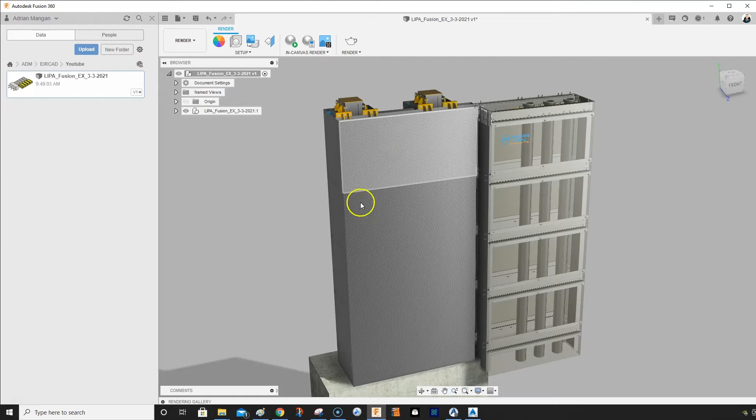So this is part 2 of the video, where I'm going from Fusion 360 to the Augin app. First, this is the model I was using to render in Fusion 360. This will not export great because of the finishes on it.

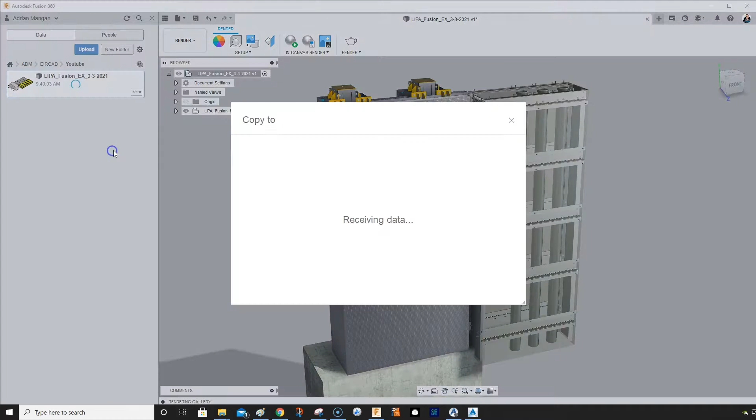So what I'm going to do is remove these elements, but I don't want to lose them. So I'll check the time on this file, you can see it's 9:49, then I'll copy it to the same folder. The copy now shows 10:16, which is the current time. I'm going to click on this and rename it.

I'm going to name this Augin, or we can just call it AR, depending where we're going to use it.

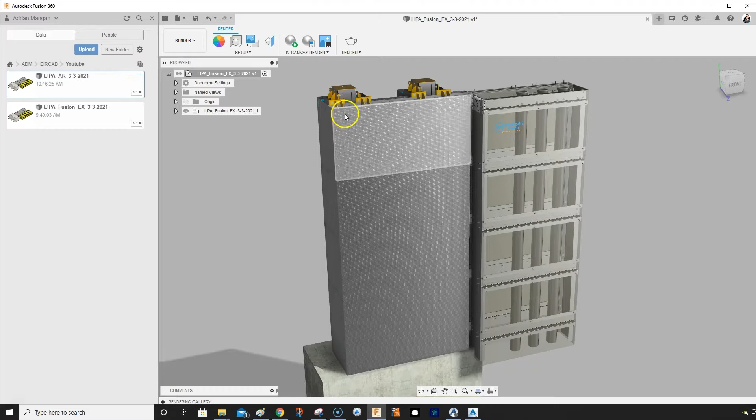I'll leave this one open because it's got some renderings running in it, as you can see here. I don't think it's going to give me a preview yet, it's too early. Oh, there it is. So we can close that.

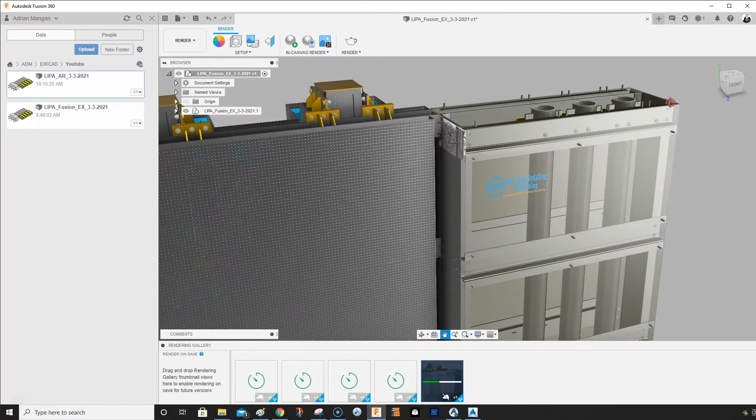So now what I've found is I have used a glass finish before, which did actually work. It wasn't clear, but so what we're going to do is make sure we don't start working in this one. Let's open this other one.

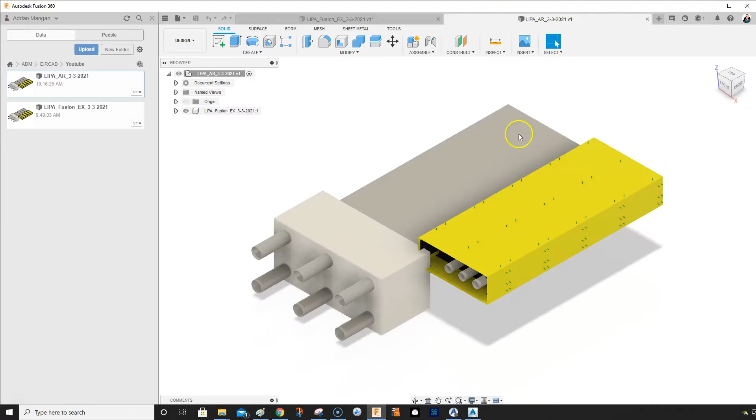It'll open our second file up here, which will be called Lipa AR. This is it here.

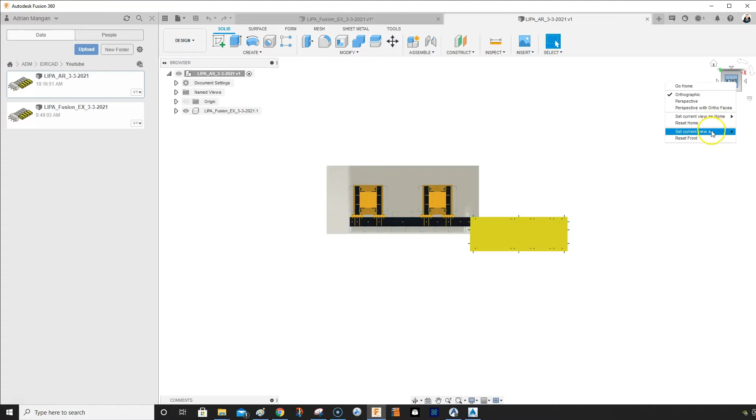Let's reset this, so let's click on this as the top. Make sure you click on it to have it going at a 90-degree angle first, very important. So let's set this as the top.

So now, for my model purposes, I don't want these because I won't be able to see, because the augmented reality right now, the way I use it, doesn't. You can't see through elements just yet.

So let's create components from bodies again. It'll take a second, and then what we're going to do is turn off these plates.

So what we can do is double click on them. We can find one and we should be able to get the rest of them. You can either turn them off or delete them. Usually when I copy the file, I'll just delete them because I have the original file here anyway.

This is taking a little bit longer because the other file is doing some renderings for me. So these should turn to components right now.

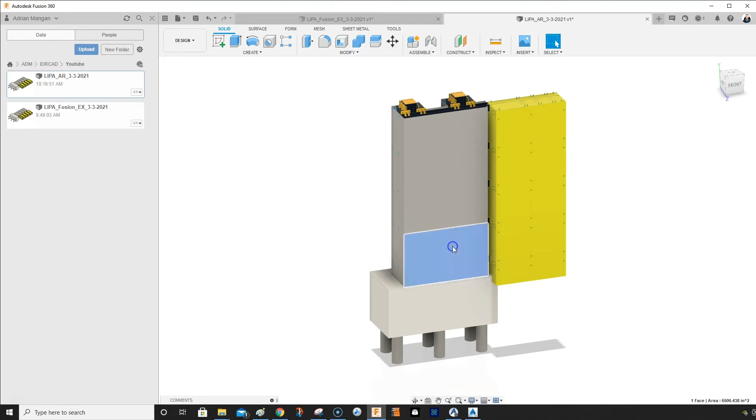And then what we'll do is double click on these and these, we'll turn them all off because all we want is the structure. Now if I click on it and right click, sometimes it'll let you delete these, other times it won't. See, it's an error, you have to find it in here to delete it.

So let's click on this one and we'll scroll down. Because we're running renderings in the other one, like I just said, it'll be a little bit slower, it can be a little jumpy.

Now here's your first plate, so click on the second one. Yeah, so a lot of times you can see that's a plate there as well, this is a side plate.

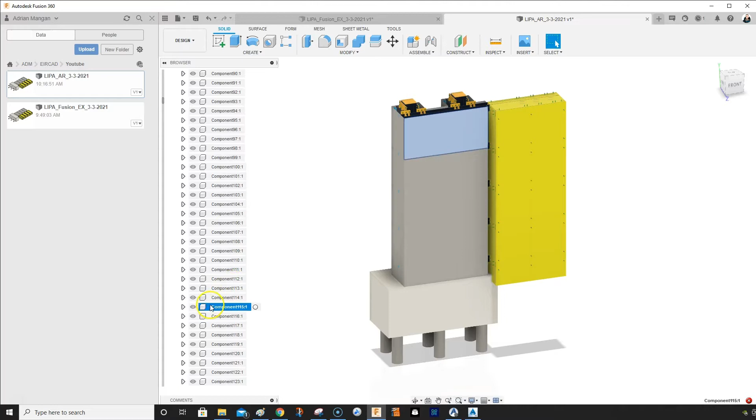So what we'll do is come in here and just delete it, we'll do it the easy way, we'll delete that one, so that's 15 gone.

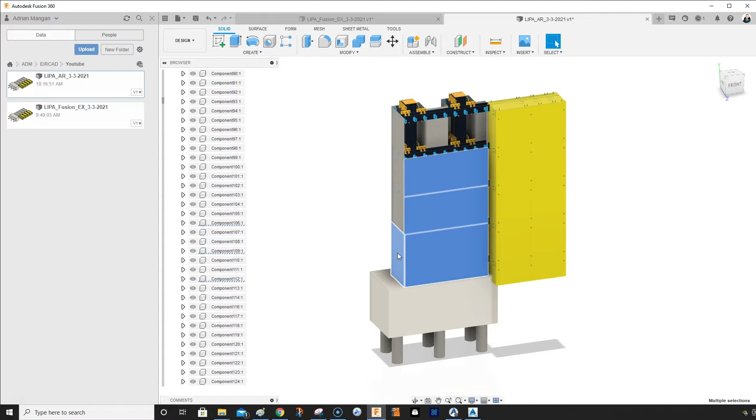So if we click here, we can see that's 12, 9, 6, can't see that one, so we'll just delete these ones, 12, 9, and 6.

So we deleted the front. What we'll do is just delete the front plates, right?

So let's click on this one, double click, let's scroll, we don't know what direction it is, it could be up or down. It doesn't seem to be up here, so it's probably the other direction. Just scroll the whole way anyway.

Ideally I wouldn't really have another project running at the same time in Fusion, because, as you know, it's an online program, so it's not just relying on your computer, it's also relying on your internet and other things.

So if we keep scrolling it could be a little time consuming, but I figured it was better to include it in the video. You can always fast forward through it.

So sometimes it's better to just grab this bar. There you go, so there it is there. It takes a little time, but doesn't take forever.

So let's click on these other ones, see if they should be close to it. There you go, so it's this 4 here. So let's start with this one, delete.

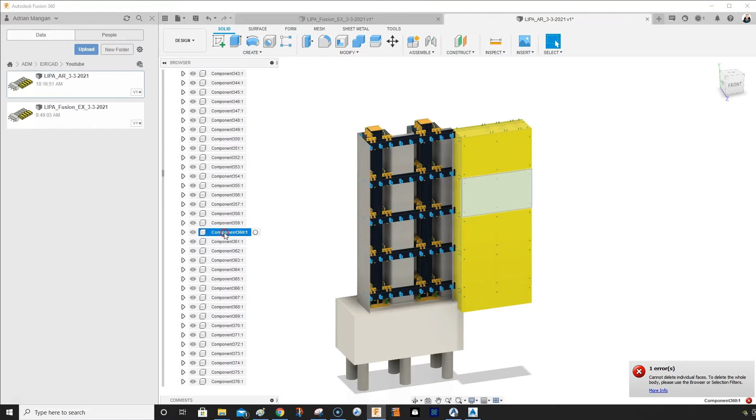It didn't delete the first one because I had it selected like that and it was trying to delete the face. So what number was that again? Sorry, 360. Delete.

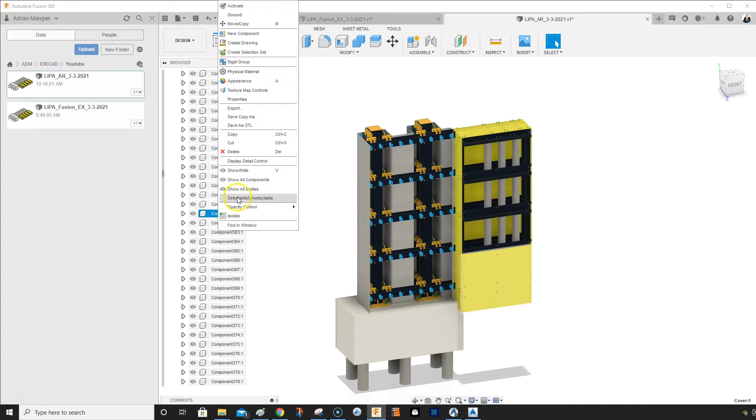359. Delete. Now you can also rename these, so I could call this cover plate 1. But we won't, we'll delete it. Alright, the ones on the top, let's not worry about them.

Now what we're going to do is, some of these appearances will go through, so what we'll do is let's render it a little bit. Let's render this.

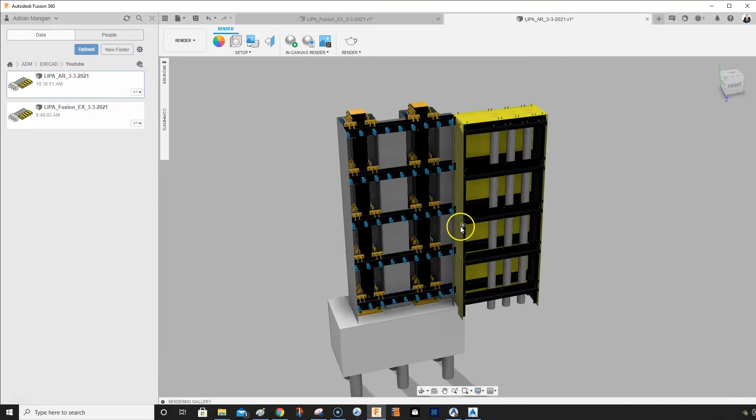Let's go to appearances and we're going to change some of these, because this is not going to work as wire mesh as far as I know, so it'll just end up coming out black. So if we do...

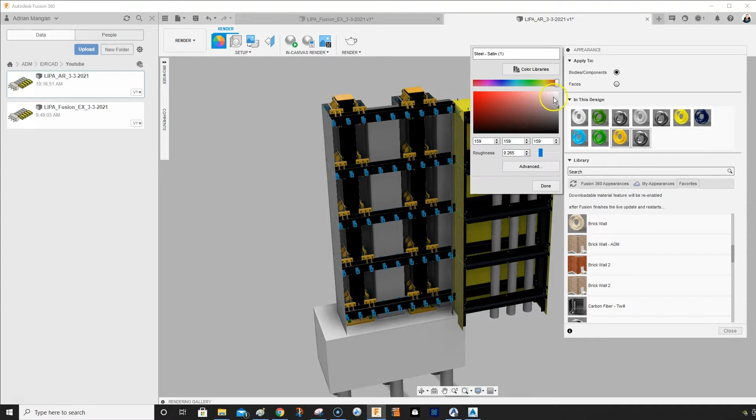I had a glass set up before which worked really well, but it's apparently not saved. So what we can just do is we'll just do something like steel and change it. We'll duplicate this and back the color down a little bit to a light color, and let's select all objects and apply that to this.

Now you're going to have a certain amount of tweaking around with this to get it right for yourself, so don't worry about it. I'm just going to click on these fast.

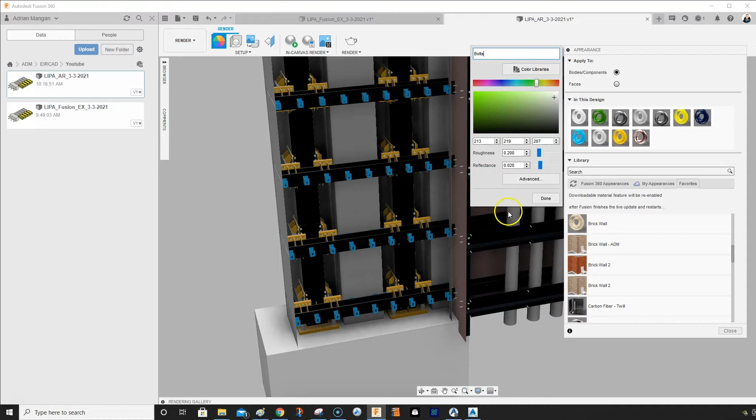You should also rename these. These are the bolts, so we can rename this bolt so you can find it again easier. And you can see the bolts have changed there.

Stainless steel, let's see, so we might be okay. Let's change this. We can delete that, that does nothing. Let's change the steel color.

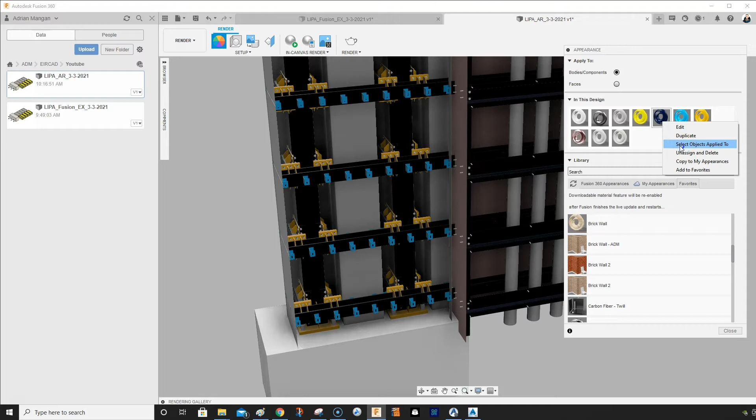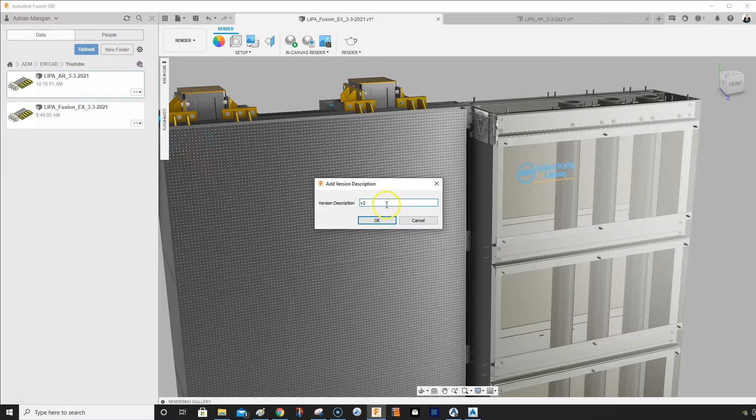Now, one tip I'll give you that I didn't do correctly. When I copied this file, the reason it doesn't have the appearances on it is because in this other one, I should have gone to save and saved it as version 2, and if you look over here you'll see this change. I should have realized when I looked at this that it was still the original save, so when I copied it over, that's why it copied over the way it did.

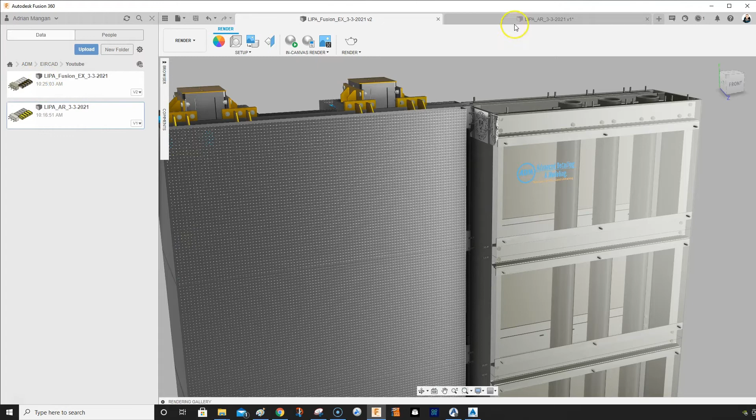So just keep that in mind. If you wanted to keep these when you copy it, save it first and then copy it. So now you can see the appearances are on this one, so that's why that didn't happen. But that's fine, it doesn't really matter because I wanted to do the appearances again anyway.

So let's check, select objects, apply to. Alright, so that's those plates. Let's go to appearances, and let's go to... you have to go to something pretty simple. Let's go to an aluminum.

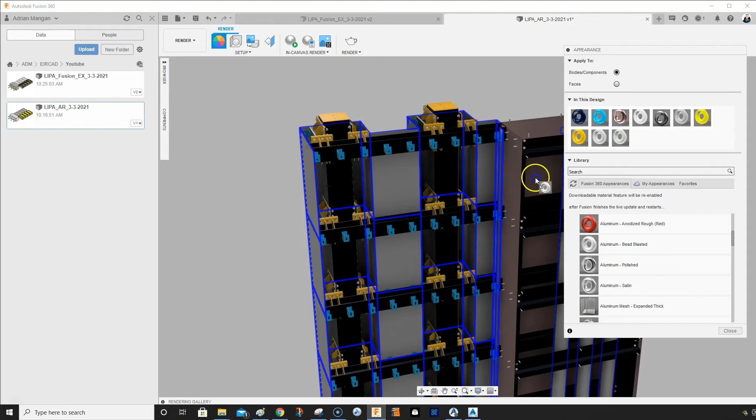Bead blasted, we'll try that and see. Now, like I said, it's going to be a lot of trial and error here. Let's click on these beams, let's back them down to kind of a blue color, a light one. Let's go lighter even.

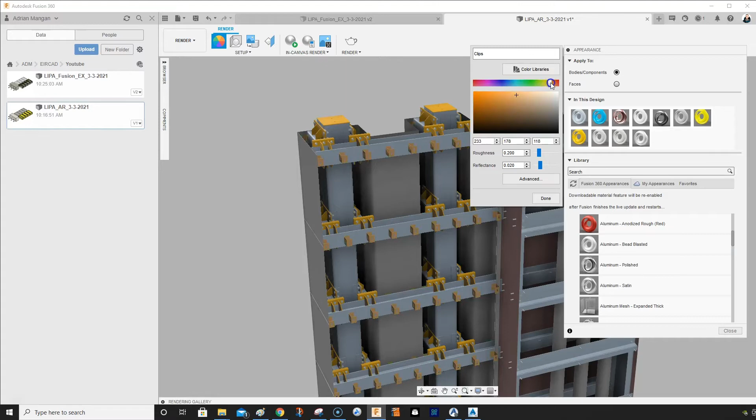And these clips, let's just rename that to clips, and let's back the color down to darker and in between. Nah, let's change it to like some sort of red or something like that, like an orange, a yellow. The yellow seems to be kind of safe, blue and yellow.

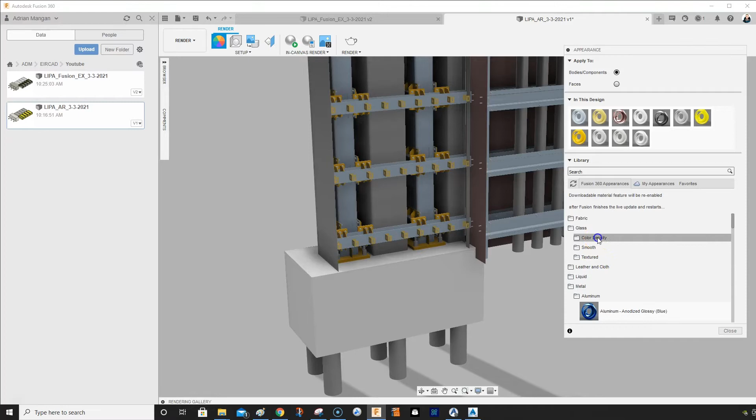So, alright, I think we're pretty good there. I don't want this concrete to have a concrete finish because then it won't show up properly. So what I might do is, let's see what happens when we put some glass on it. Let's just do a light colored glass, and we'll apply that to all of these.

Now I could have just selected them up here in the browser like I did before, but you can also just drag them on like this.

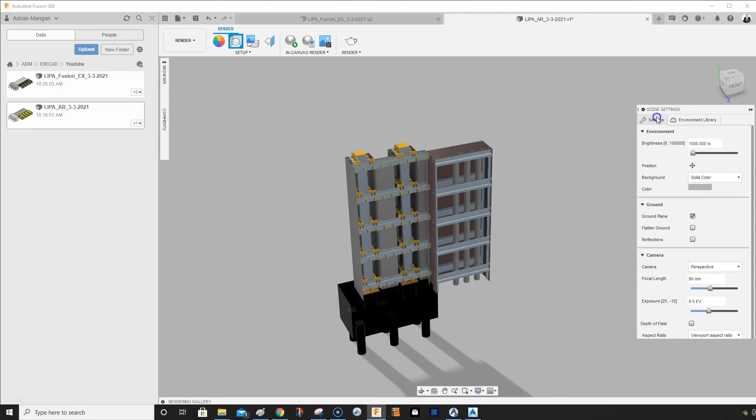So to give you an idea what this looks like, let's change the background. Let's go to the environment. Now you can see there's a lot of settings in here. You can play around with perspective, all those things.

You can save the defaults. I don't usually, I just kind of start from scratch each time. It doesn't take that long. So you get something like that. If I close that and then do play, you can see it'll render that and it'll give you an idea of what it looks like, right?

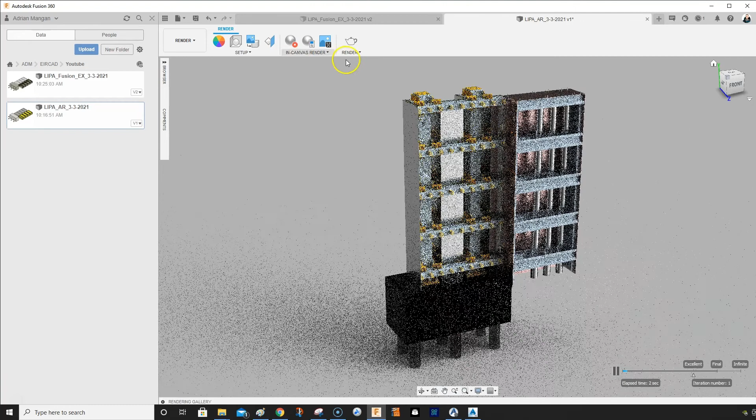So it's not really what we want it to look like, but that should hopefully work for the Augin app. So let's export and we'll see what happens.

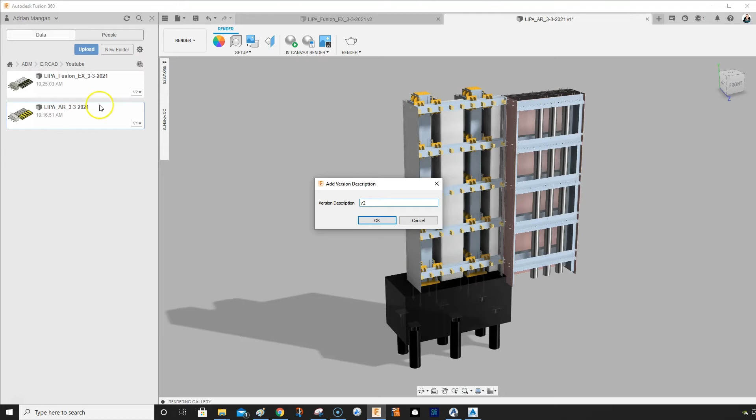So first of all, let's stop this and let's save this as version 2, and you'll see the image will change here from that yellow, and the plates will be gone on the front.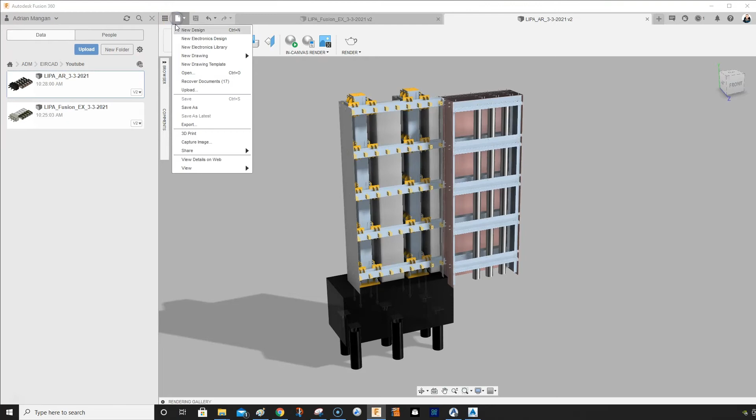And what I'm going to do now is export this, so that the Augin app is the FBX file. So I'm going to go to File, Export. It's set to F3D first, so go to FBX file. Where do I want to save that? I'll save that back into the folder where the job was, which is this folder here, and that's fine.

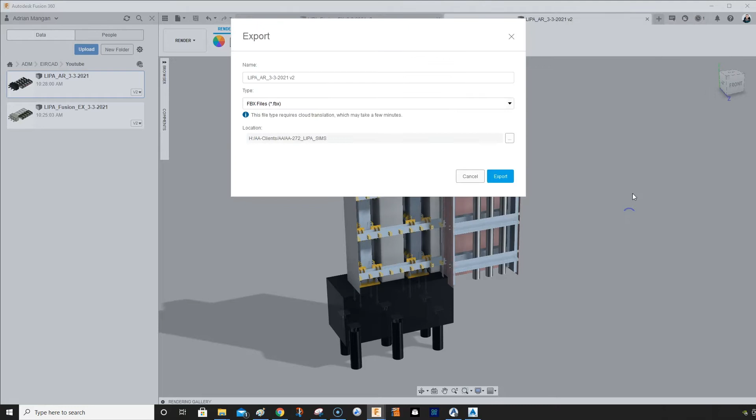And export. Now it's going to take a minute, so I'm going to switch over to the other screen and type in Augin app, and scroll down - it's augin.app, and it can be in Spanish.

I'm just going to try and get logged in before I drag this across. I'll enter the site, and now I'm in my Augin app. It's a free account, and the guys are very helpful if you need some help. It's in Spanish, as you can see, maybe Portuguese.

So we can upload. It does give you an option when you go to the home page to change this to English, and now we've changed it to English.

So for project name, I'm going to call it LIPA, and then we choose the file. So we're ready, let's minimize that. This is still working away, it can take a little bit of time, so I'll pause it here - it might take a couple of minutes and then we'll get back to it.

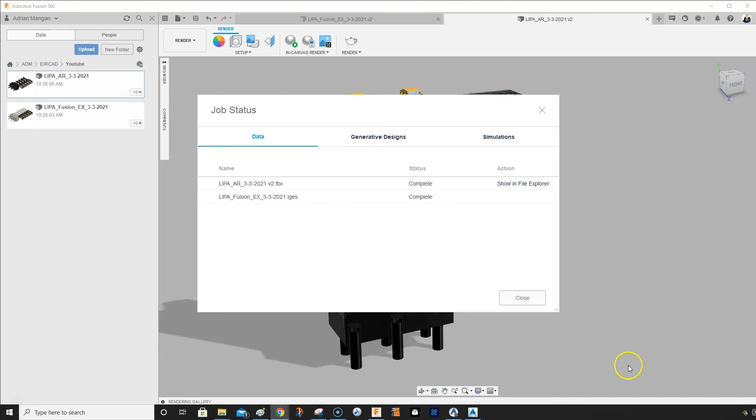So the file is uploaded - it took probably 5 minutes. Let me get back here. If I go to the file, I'm going to choose the file, go back in here, and this is the file FBX.

Open. So you can see here there's 2 file formats, IFC and FBX. I haven't really tried the IFC - I'll try that next, and that'll be a quick export from Advance Steel and a quick upload, so I can check the differences. So what I'll do is the FBX file.

First I do the FBX because I render a lot of projects anyway, so I have to bring them into Fusion anyway, so we'll just upload that. Doesn't take too long - project was successful - and then you need to go to your tablet. I'll record what's on the tablet and show you.

Hi, so I recorded this on my iPad. The sound wasn't very good, so I'm going to do a voiceover on this.

So here I am on the iPad on my screen, and there you can see the Augin app in the top left hand corner. I'm going to click on that - here's the app here. I'm going to click on the app, it'll open, and it's just going to load up whatever settings and models I have in there.

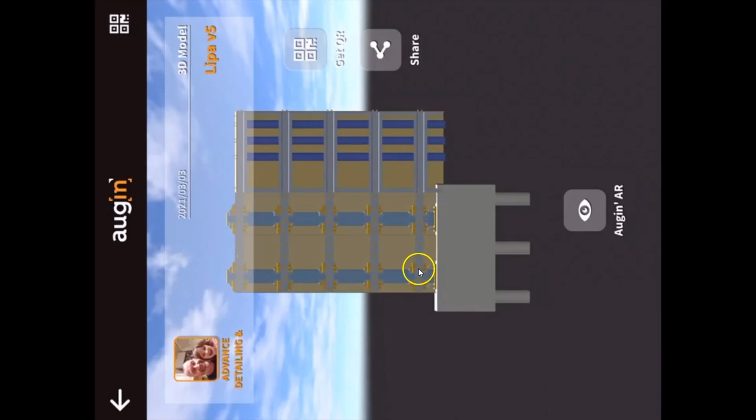Here's your model. You can rotate this model by just using your fingers on the screen, as I'm doing there. It's on its side because I kept the iPad in landscape mode, because I want to view in landscape mode so the video's not switching over and back.

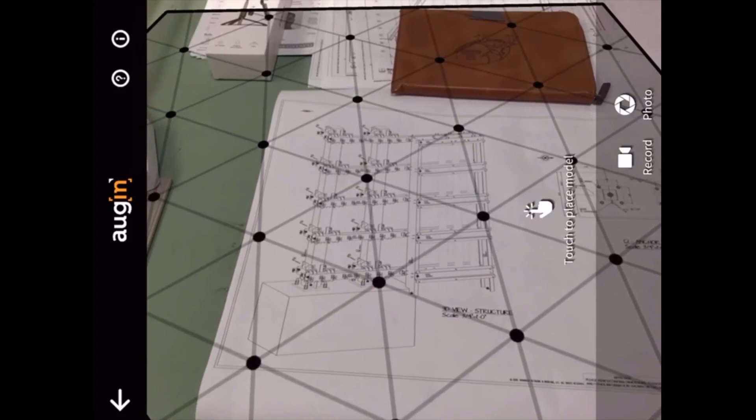So now you'll see this grid appear, and this grid is to locate - you can see touch to place the model. Before this used to find it difficult to pick a surface, but it works really good now.

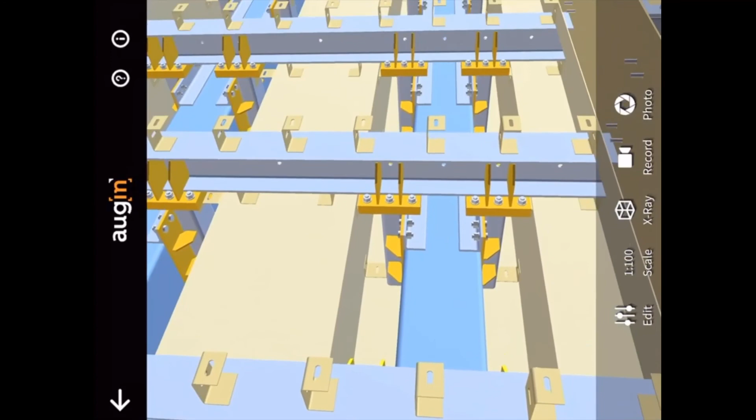And you can see here the model has come in a pretty large size, probably close to right scale I'd say - hard to tell really, but probably. So just use your fingers, pinch your fingers together like you do on a screen to make a photo bigger or smaller. Then there's also the X-ray mode.

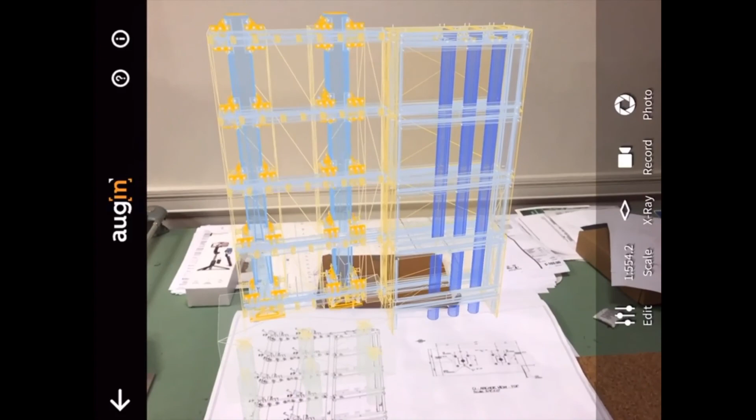The screen recording is a little choppy, but the Augin app is not that choppy - it's a lot more smooth than what you're seeing here on the screen. So you can see I have some holes there, that's why there's lines on those plates. You can see through the plates, which is really good - you can see through everything. So that's the X-ray mode.

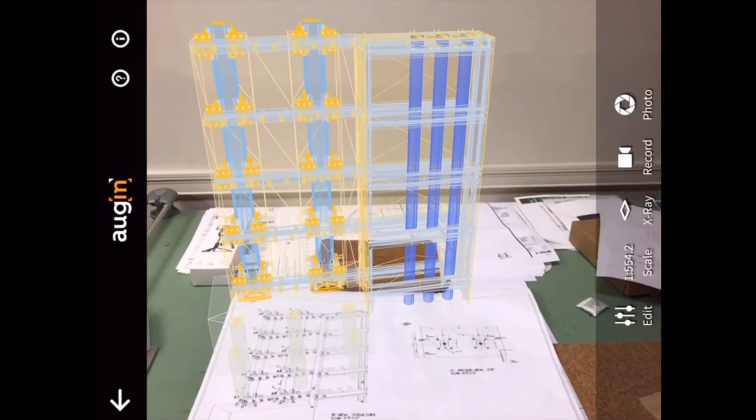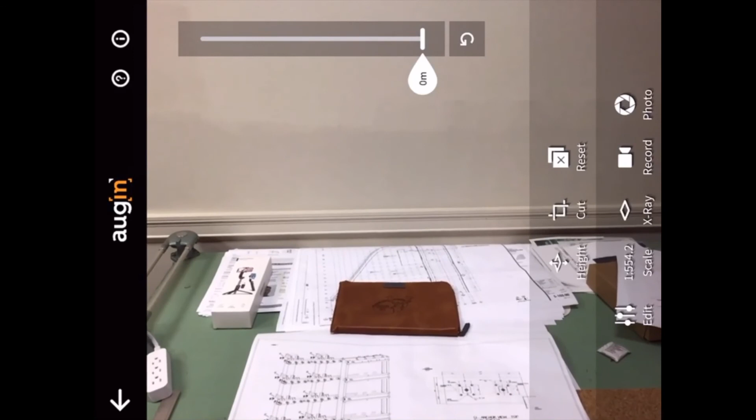Now you can also go to the edit button, and there's some other options. You can cut through the model, so you can cut from the top down. You can also cut from the bottom up, but it also moves the model down through the zero axis, which is good - looks really good.

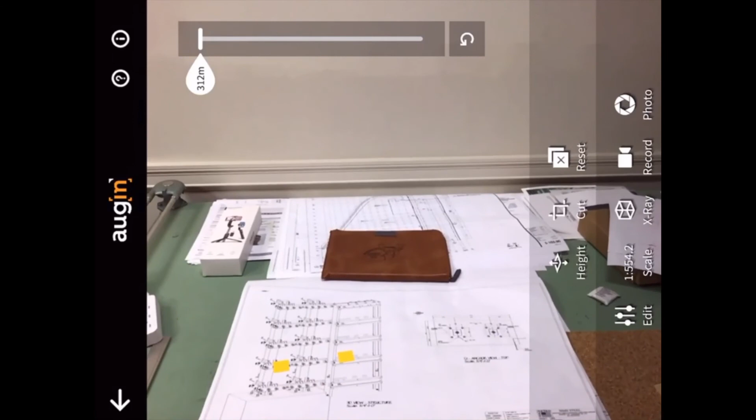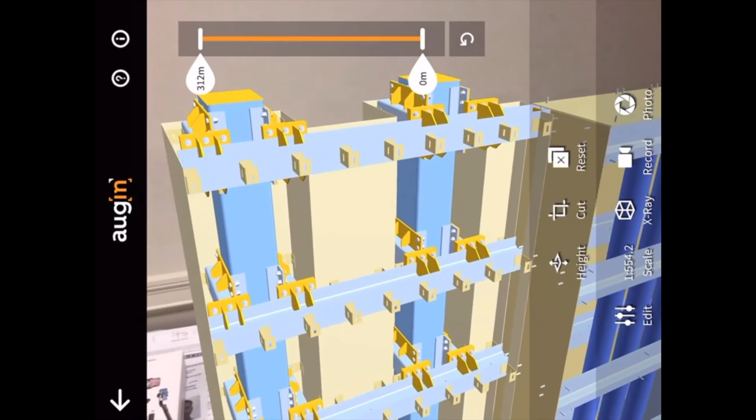Now if I hit the X-ray button twice, it'll go back to shaded mode, and I can pull it back up shaded, which is kind of cool. So I just want to repeat that the choppiness is from my video recording, not from the Augin app. I'm doing a screen recording there, and obviously it doesn't work so good.

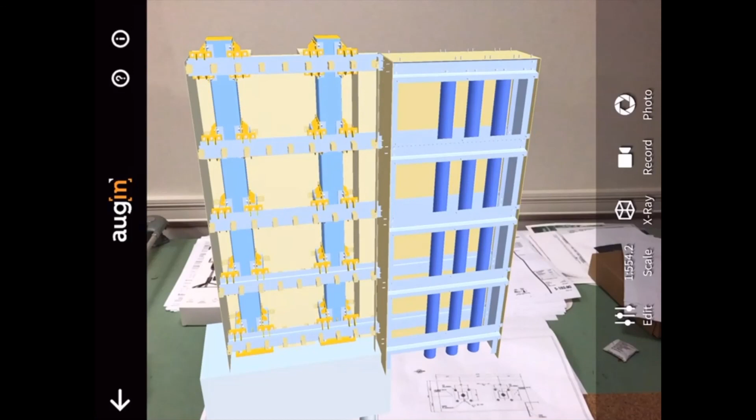So as you can see, I just took a screenshot there, so you can take screenshots. It really is quite useful - the app works really good now. I used to use a different app, and also it's automatic upload - some of the other ones aren't automatic upload. So I hope that helps.